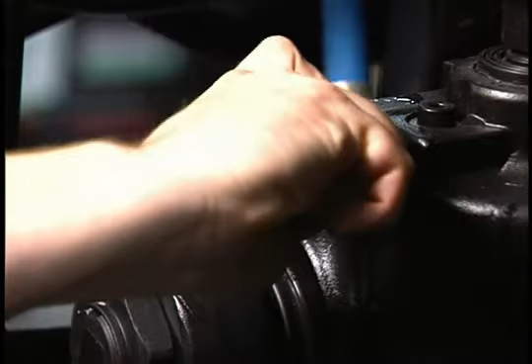For years, threaded connections were the standard for most hydraulic applications. The process was laborious, time-consuming, costly, and not without its share of failures. Now there's an easier way. STC Snap-to-Connect system of hose connectors from Eaton, the leader in high-pressure threadless connector technology.

STC connectors are the near-perfect solution. Virtually no leaks, or torque, or O-ring fallout. Warranty claims are almost a thing of the past, and there are no special tools required for installation. And it's impossible to cross-thread them. These benefits add up to the best Snap-to-Connect connector on the market.

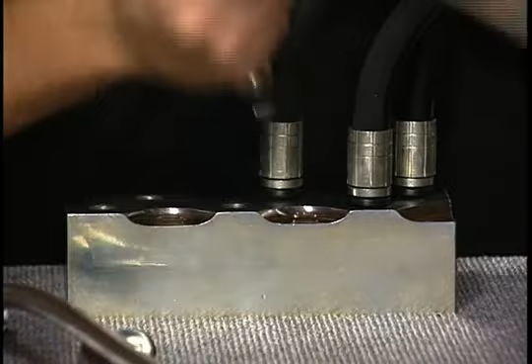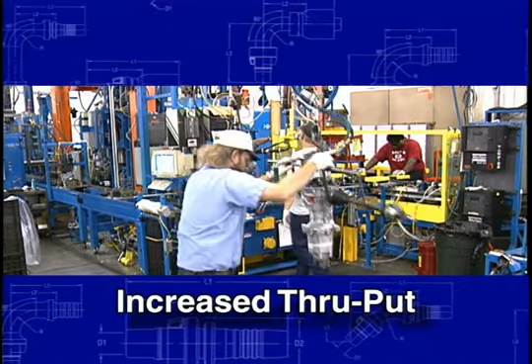STC connections meet the needs of the industry, increased performance, improved ergonomics for assembly, and faster throughput, while virtually eliminating leakage on connections. The savings are everywhere using the STC system. Increased throughput on the assembly line. Installation time is significantly reduced, and even when you need to repair a connection, it is as simple as clicking the two components together, compared to using threaded connectors.

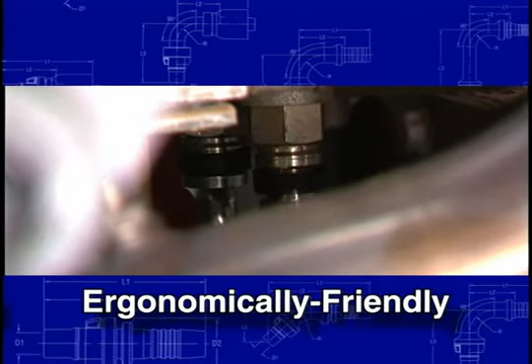The STC system is ergonomically friendly, making installation in confined areas and hard-to-reach places a snap, without any cumbersome tools and scraped fingers. Using STC connectors can remove additional costs, such as labor associated with threaded connectors, rework due to leakage, and tool calibration. STC connectors are a solid value proposition.

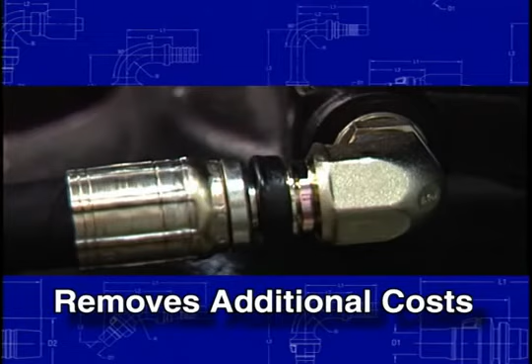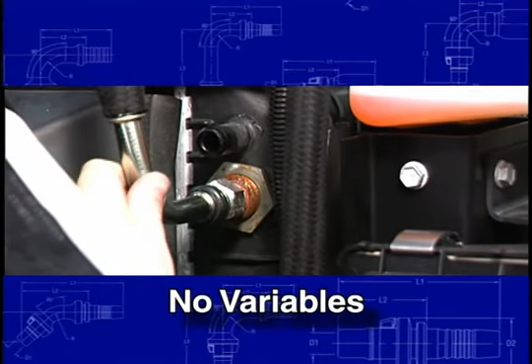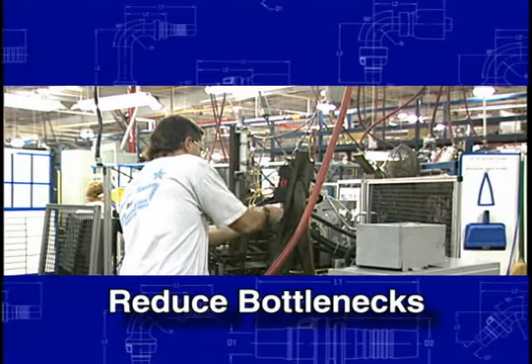There are no variables such as assembly tools that can cause problems, either at the time of installation or down the road. Just one reliable connection that is perfect every time. Most warranty issues are eliminated, the perfect choice for use in high warranty claim areas. Plus, STC connectors also help reduce production bottlenecks.

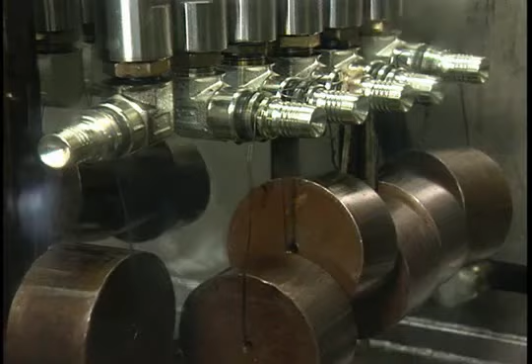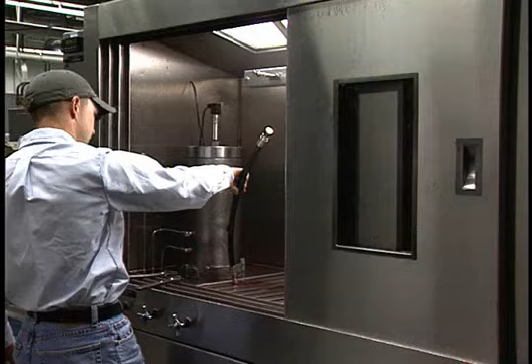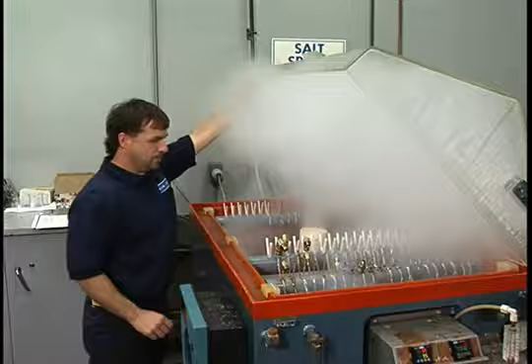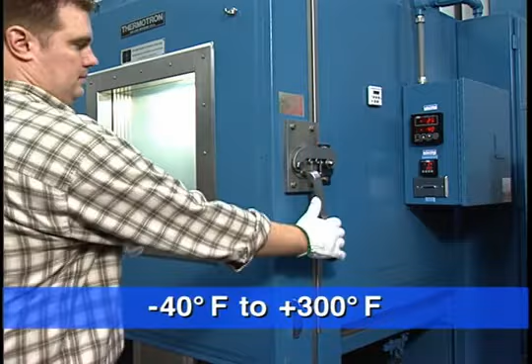Vibration tests from 5 to 500 Hertz. The dust box and seal integrity test, and operation in temperature extremes from minus 40 degrees Fahrenheit to 300 degrees Fahrenheit. And still, the STC connectors hold their own.

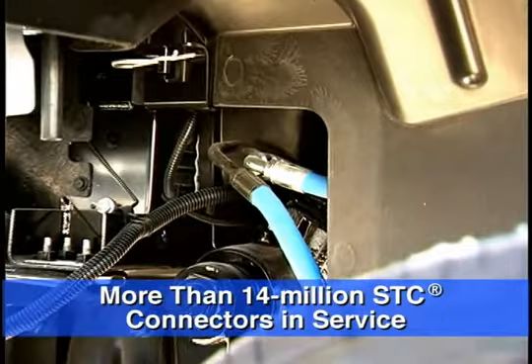But even more important is the actual operation. There are more than 14 million STC connectors in service, a remarkable achievement that demonstrates the durability and quality of every STC connection. Once it is properly connected, there has not been a report of a single failure in the field.

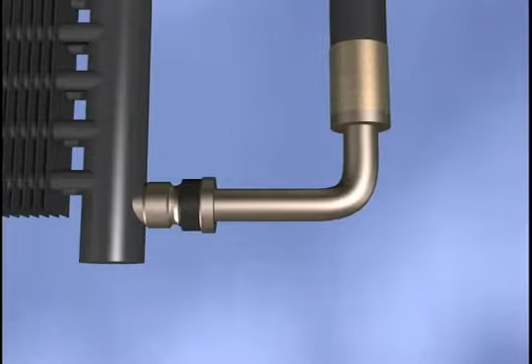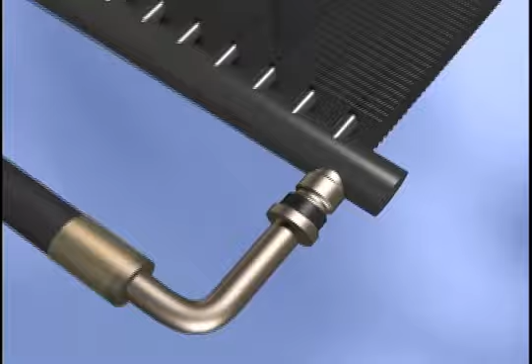The STC connection involves a female half available in a threaded conversion adapter, a braze-on adapter, or direct ported into the mating material. To assemble the hose, simply snap the hose into the female STC connector. The connection will not pull apart by hand when properly connected. To disconnect, simply push the special tool behind the rubber release sleeve and hold the tool in place while pulling the fittings apart.

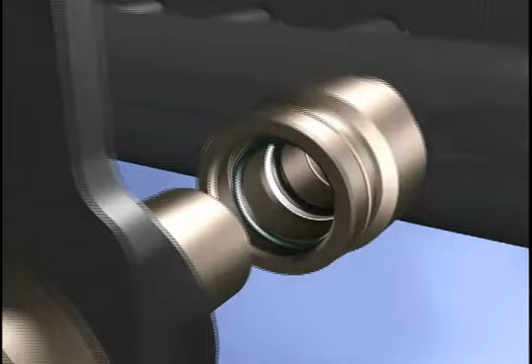The internal components of the female connector consist of a wire latch ring, an O-ring, and a backup ring. These 3 internal components are also available as a repair kit. Here's how it works. When the hose is inserted, the wire latch ring slides up and over the male half ramp on the hose fitting and locks the hose in place. The O-ring and backup ring provide a high-pressure seal.

The rubber release sleeve also seals the connection, guarding against outside contamination. When the special tool is inserted behind the rubber release sleeve, it pushes the metal insert against the wire latch ring. This travels up and over the male half ramp until expanding into the groove in the female half, allowing the male half to be removed from the connection.

But don't take our word for it. Customers who use the STC connections and distributors who market them are sold on the ease of use, the increased throughput, and the virtual elimination of leaky connections. It really is the next generation of the way hose and hose fittings will be in the marketplace.

You know, what I see is a savings in not only labor and production, but also another product that the average hose distributor and factory rep will be able to sell into the marketplace. It's a very, very revolutionary fitting.

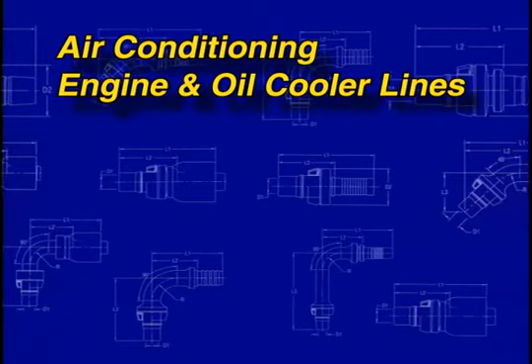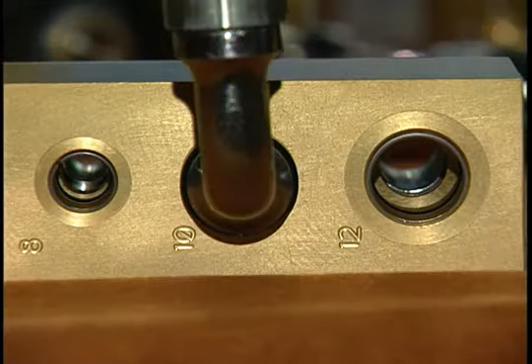The STC system is engineered and designed to be used in a wide range of current applications, including air conditioning, engine and oil cooler lines on engines, power steering, brakes, air and hydraulic, fuel lines, valves, HRCs, and couplings. STC connectors can sustain pressures up to 5,000 psi with STC adapters and even higher pressures with direct port STC connectors.

The STC system has been accepted and adopted worldwide, the perfect fit anywhere in the world, for every global application and every global business. The good thing is that the design is global, so the customers can have the spare parts in Europe, also in Asia Pacific and US. And STC connectors are also available through the Eaton aftermarket distribution channels.

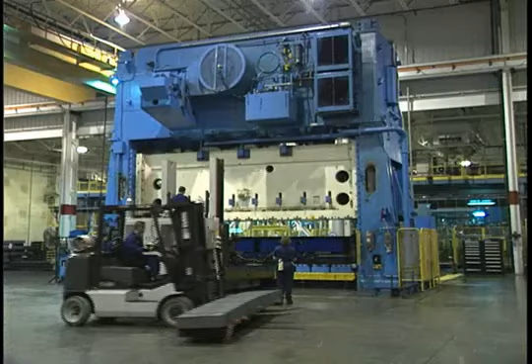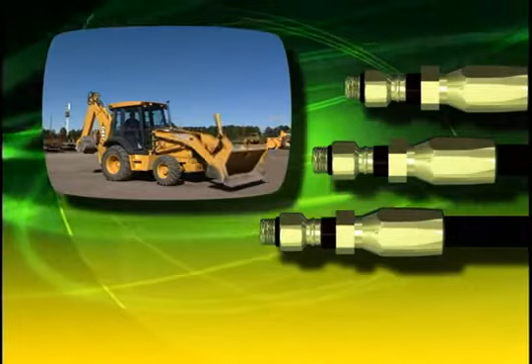Whether industrial, agricultural, material handling, mobile equipment, OEMs, truck and bus, construction, or turf care, every industry can benefit from the superior STC technology. A major manufacturer of heavy equipment switched to STC connectors in place of threaded connections for its end fittings on the hydraulic brake and power steering lines on its backhoe loaders, and not only gained reliability, but realized a 50% reduction in labor time for hose assembly.

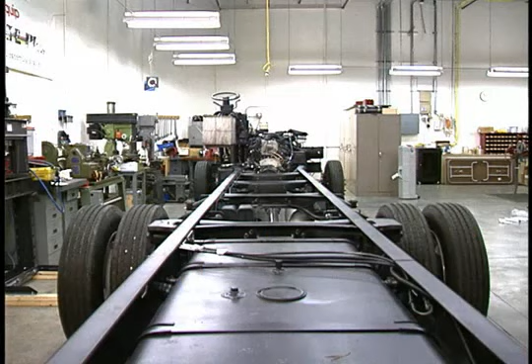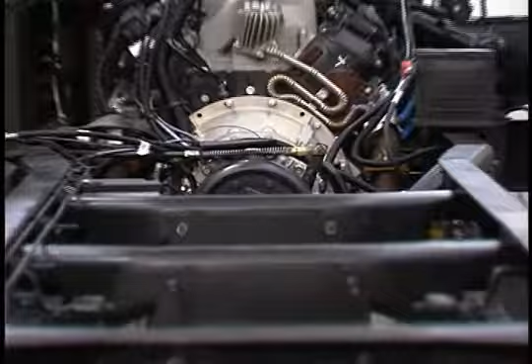Companies such as Cat, John Deere, Workhorse Custom Chassis, International, Volvo, and others are turning to STC connectors. In fact, Workhorse enthusiastically endorses the support of Eaton and our STC designs. They believe that the STC connector is an outstanding product that offers savings in manufacturing time and service.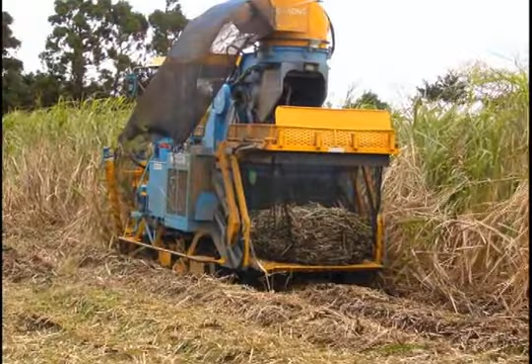Bunmei, a manufacturer of sugarcane harvesting equipment in Japan, has replaced over 150 standard threaded connections on its equipment with STC connections. Equipment assembly time has been reduced from 3 to 1.5 days.

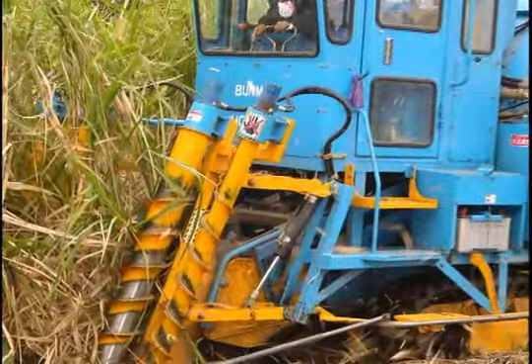Now, if all this doesn't impress you, this will. Take the STC challenge. On the left, a technician using traditional tools to hand tighten and then torque down a standard hydraulic connection. On the right, the STC system. Ready, set, go. In as little as a few seconds, an STC connection is completed and secure.

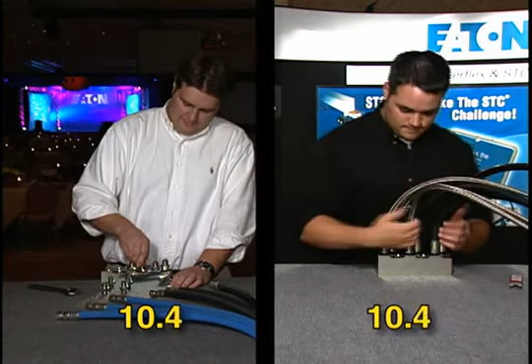The traditional method can take anywhere from 60 seconds to several minutes per connection to complete. Now that's efficiency taken to the max. To an OEM, for example, the assembly time reduction is enormous, and that translates to cost savings and adds to the bottom line.

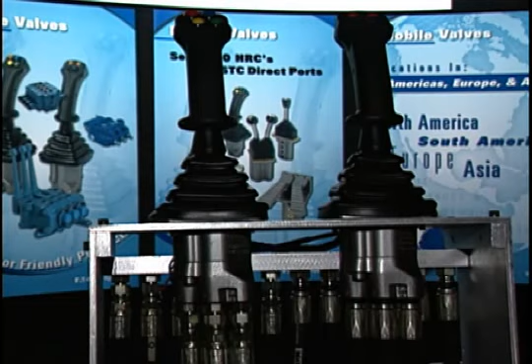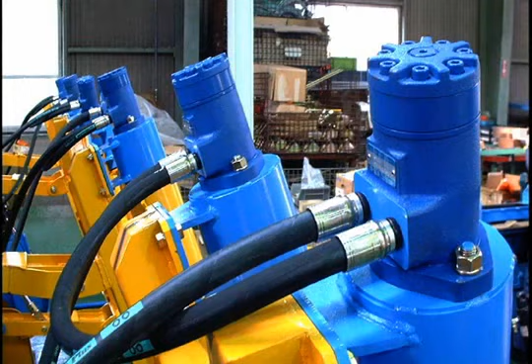Here's the best part. STC connectors can be used in combination with or incorporated into other Eaton fluid power products, such as HRCs, motors, power steering valves, and even orbit motors. And finally, licensing is available, allowing other manufacturers to design STC connectors into their components and systems.

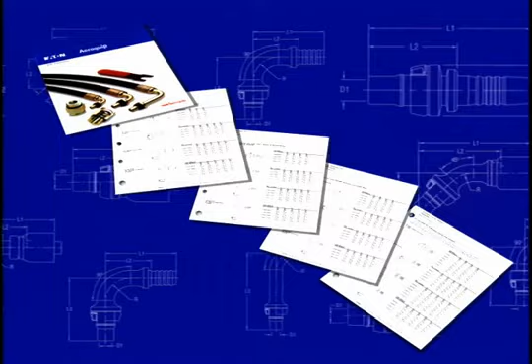STC connectors have been featured in a number of prestigious trade publications, including Machine Design, Hydraulics and Pneumatics, Diesel Progress, and Lubrication and Fluid Power. Our Eaton STC Connectors catalog has complete details about the various sizes, performance characteristics, adapters, and direct port STC connections that are available, as well as the hoses that are compatible with STC connectors. There's also a complete line of accessories and sales tools, available virtually anywhere in the world.